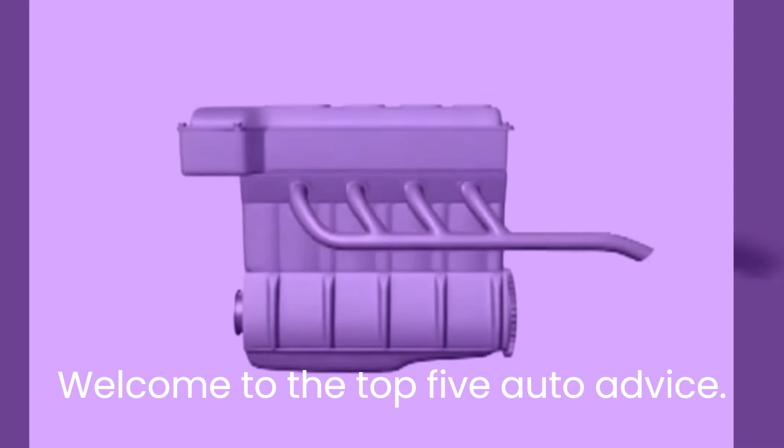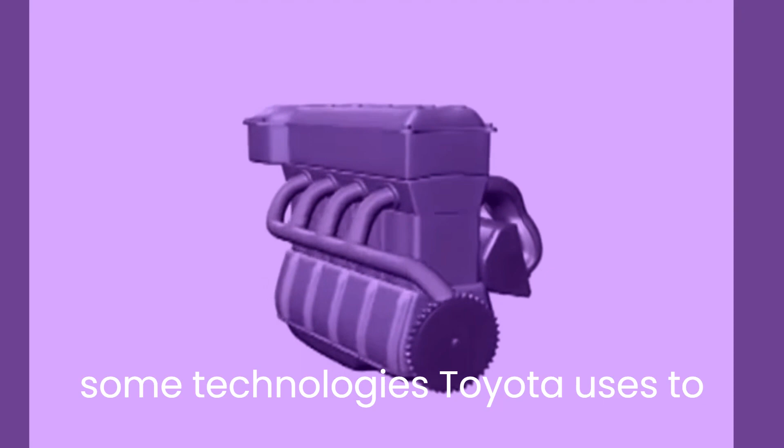First, we'll review the fundamentals of how an engine operates and some basic engine terminology before we examine some technologies Toyota uses to maximize engine performance and economy and reduce emissions.

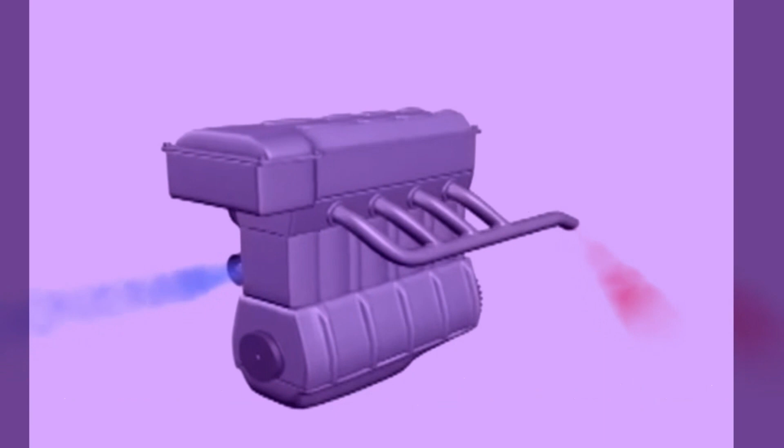We'll now look at the fundamental parts of an engine. The engine's main parts are the engine block and cylinder head. The engine's internal parts include the cylinders.

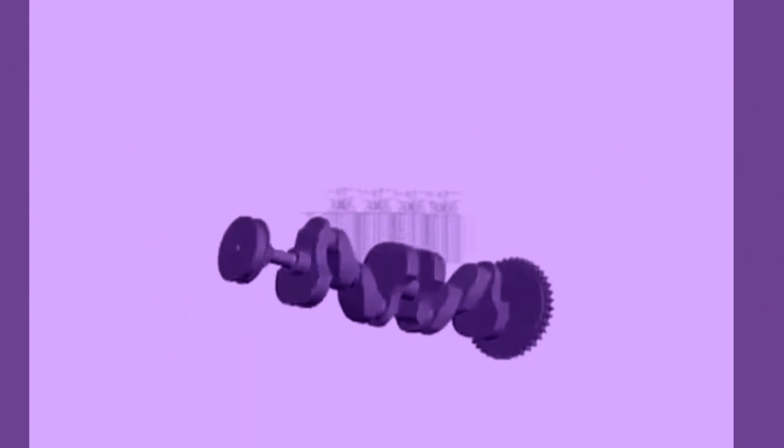An internal combustion engine requires fuel and air to operate. The more effectively an engine breathes, the more effectively it will produce power. Key components include the connecting rods, crankshaft, spark plugs, pistons, the intake and exhaust valves, and fuel injectors.

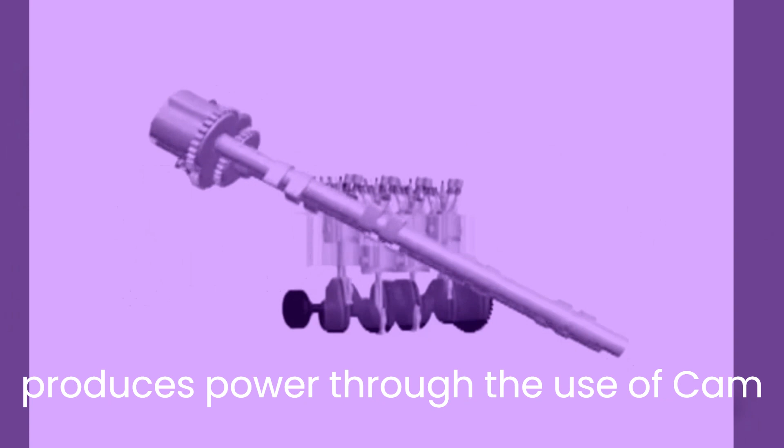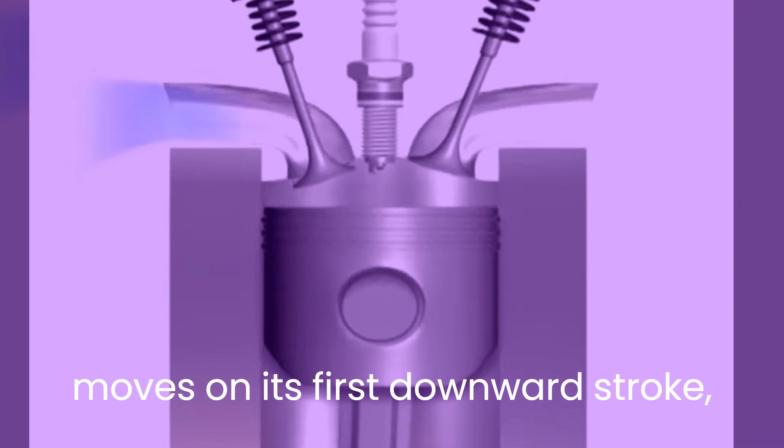The four-stroke engine produces power through the use of camshafts and a timing chain or belt. The intake stroke occurs as the piston moves on its first downward stroke, allowing a mixture of air and fuel to fill the combustion chamber.

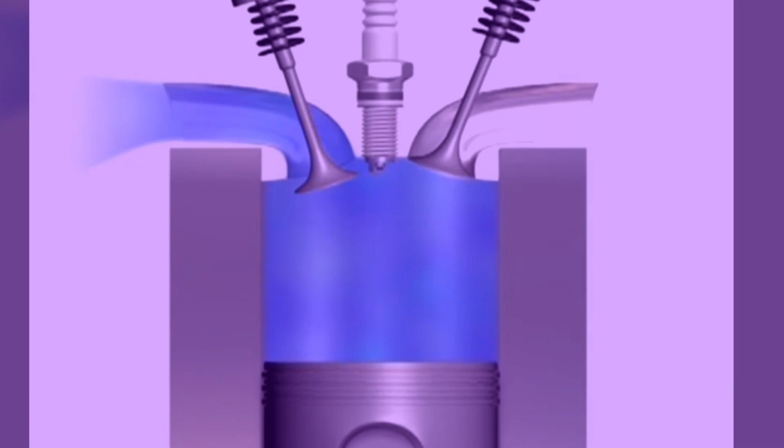The compression stroke occurs as the piston moves on its first upward stroke, compressing the air-fuel mixture, which will cause it to burn more vigorously than if it were uncompressed.

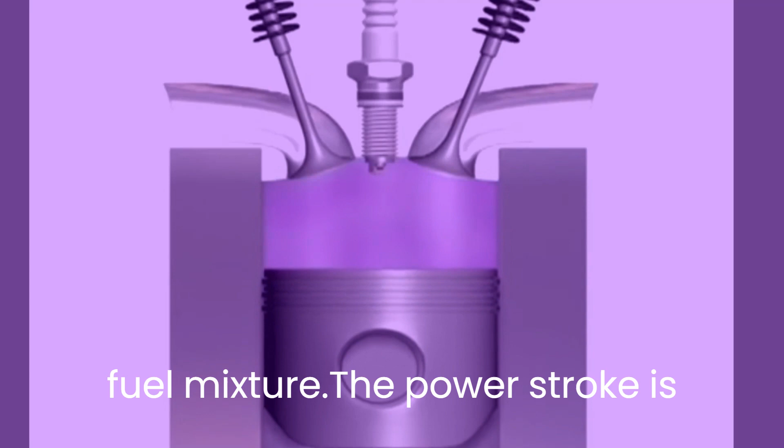Finally, the spark plug ignites the air-fuel mixture. This is what we refer to as the power stroke. The exhaust stroke occurs on the fourth stroke.

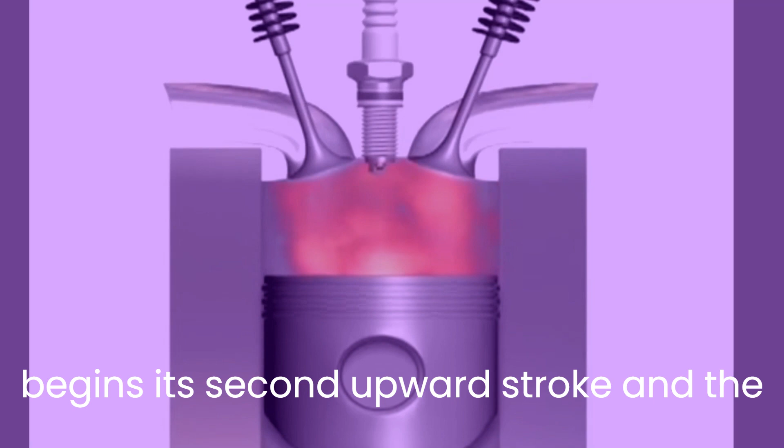The exhaust valve opens as the piston begins its second upward stroke, and the burned air-fuel mixture is ejected from the combustion chamber through the exhaust valves.

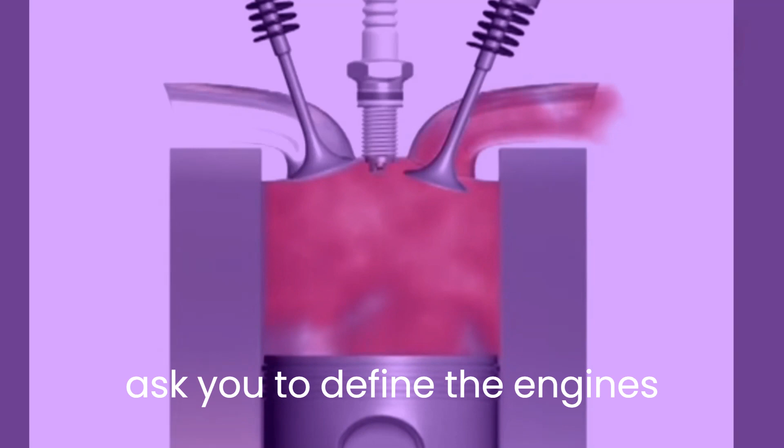Customers might ask you to define the engine's compression ratio and displacement. In this example, the compression ratio is 10 to 1. Higher compression ratios produce more power.

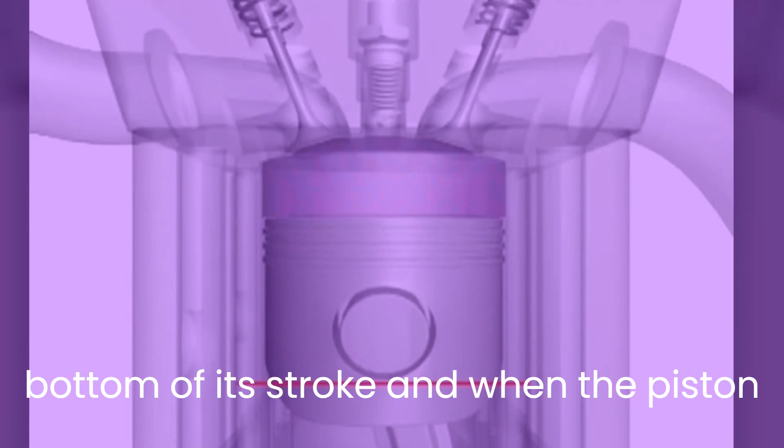Compression ratio is the ratio between the total volume of a combustion chamber and cylinder when the piston is at the bottom of its stroke and when the piston is at the top of its stroke. However, engines with higher compression ratios demand higher octane fuel than engines with lower compression ratios.

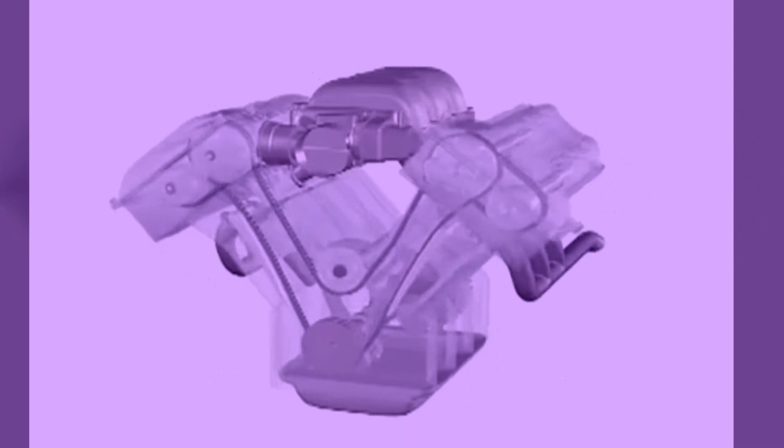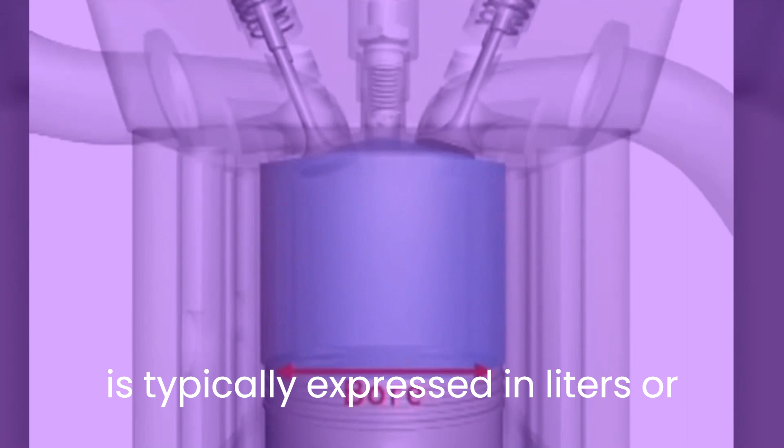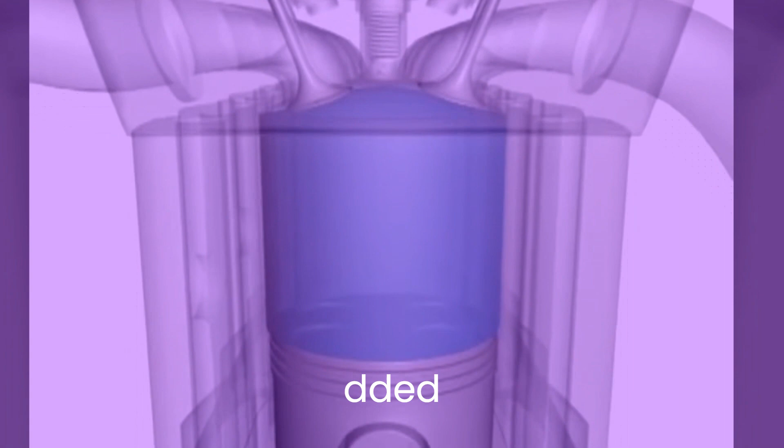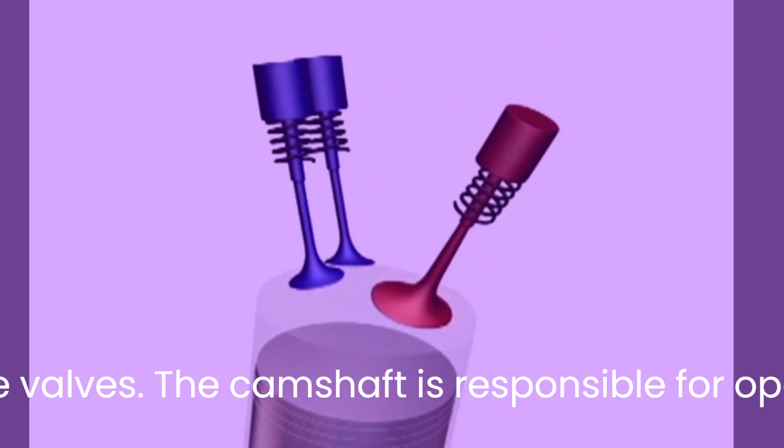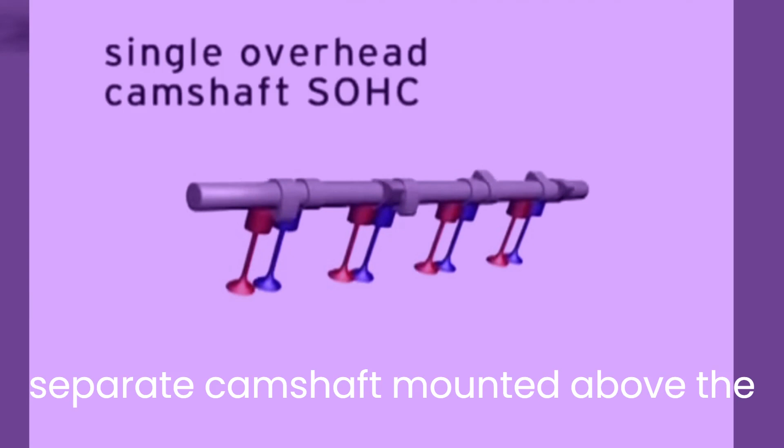The camshaft is responsible for opening and closing the valves in some engines. If the camshaft is mounted above the valves, the engine is known as a single overhead camshaft, or SOHC engine. When the intake and exhaust valves are operated by separate camshafts mounted above the valves, the engine is known as a dual overhead camshaft, or DOHC.

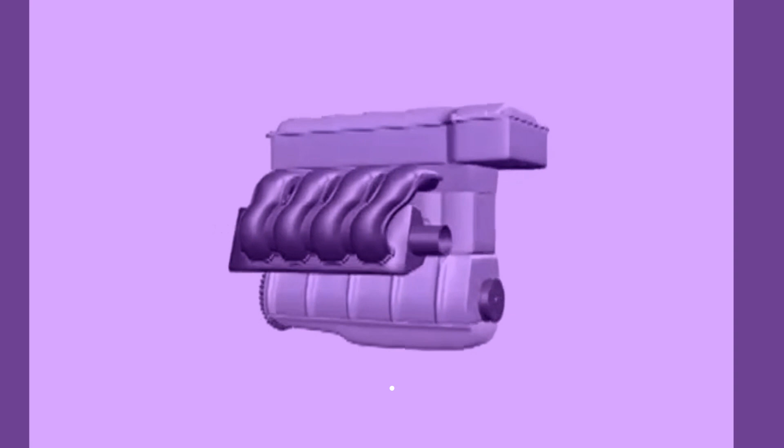DOHC, or double overhead camshafts, is the name of this design. There are double overhead camshafts in every Toyota engine. Most four-cylinder engines have an inline design, including all Toyota four-cylinder engines.

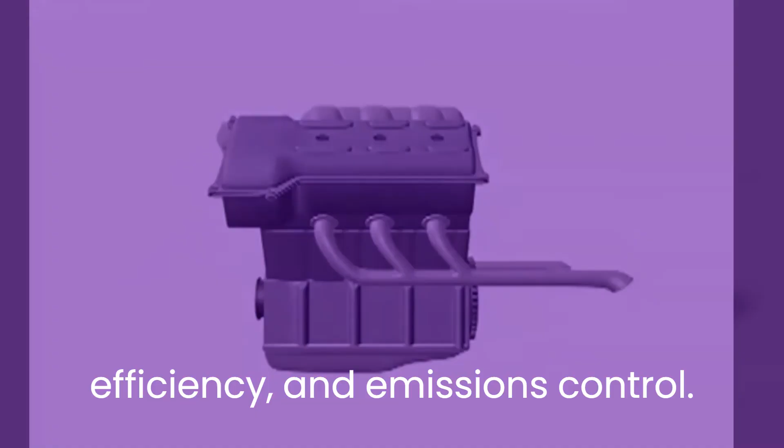How are cylinders typically arranged with more than 4 cylinders? In a V configuration. Let's examine the technologies Toyota uses in its engines to improve power output, fuel efficiency, and emissions control. All of Toyota's 6- and 8-cylinder engines are V-type engines.

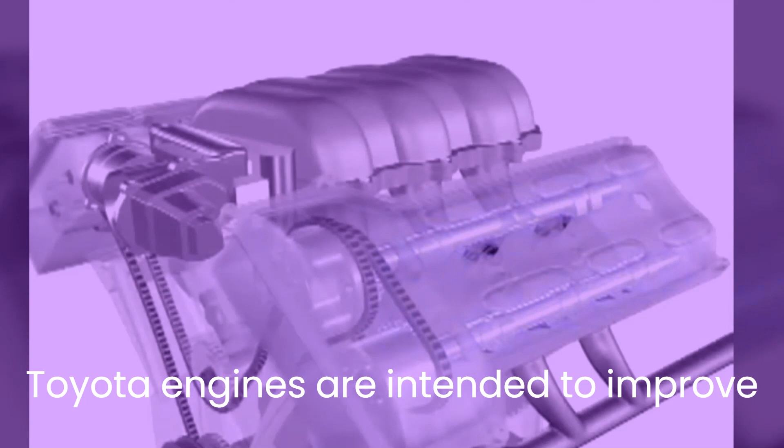An engine will produce power more effectively the more effectively it can breathe. The acoustic control induction system and other features found in Toyota engines are intended to improve the engine's ability to breathe. In order to maximize air flow into the engine and to provide more usable power throughout the entire RPM range at low speeds, the intake manifold's runners automatically vary in length.

To generate sufficient low-end power and torque, ACIS directs intake air flow through a long intake runner. Imagine doing this while inhaling deeply as you lift something heavy while driving at low engine speeds.

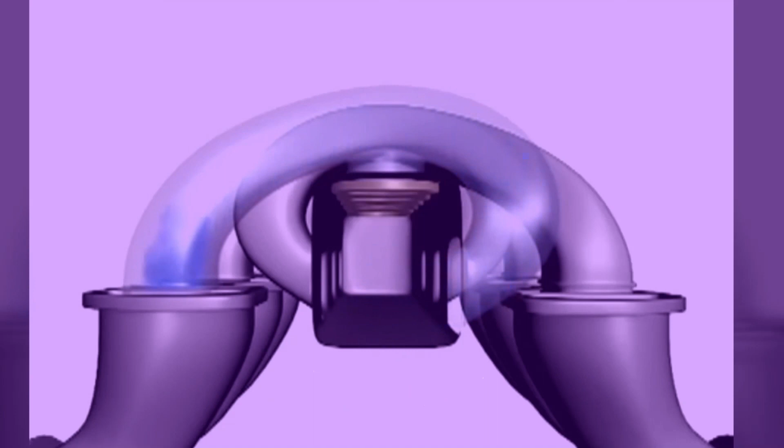In order to produce more horsepower, ACIS directs the air through a short intake runner. Some manufacturers compare it to taking rapid, shallow breaths while operating.

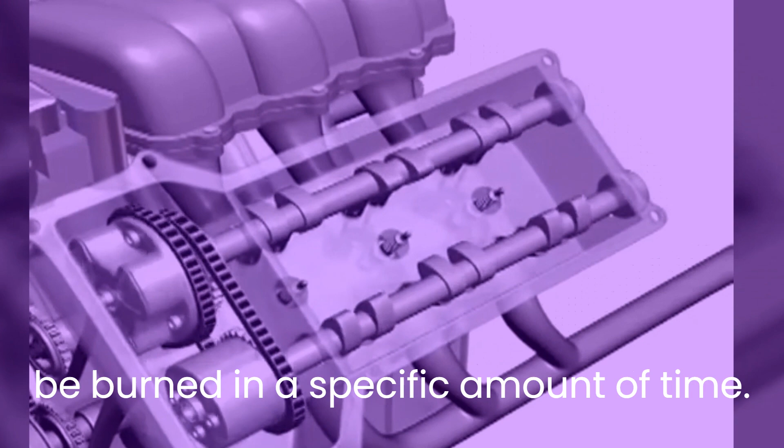Double overhead cam, or DOHC engines, which are standard in all Toyota vehicles, allow for the best placement of the valves. Benefits of a DOHC design include enhanced power output, fuel economy, and emissions control.

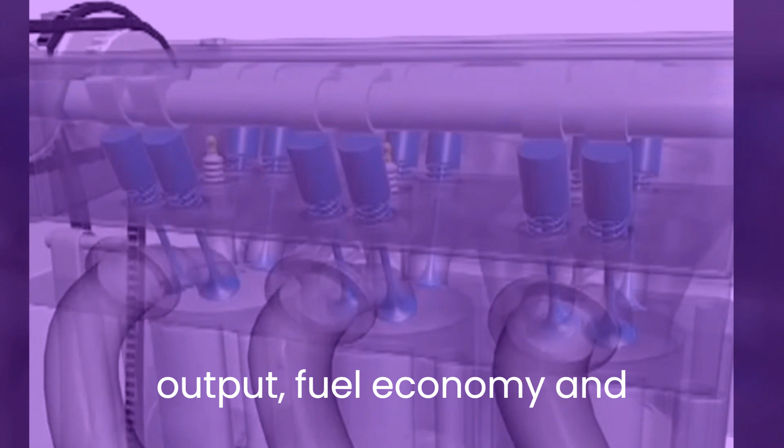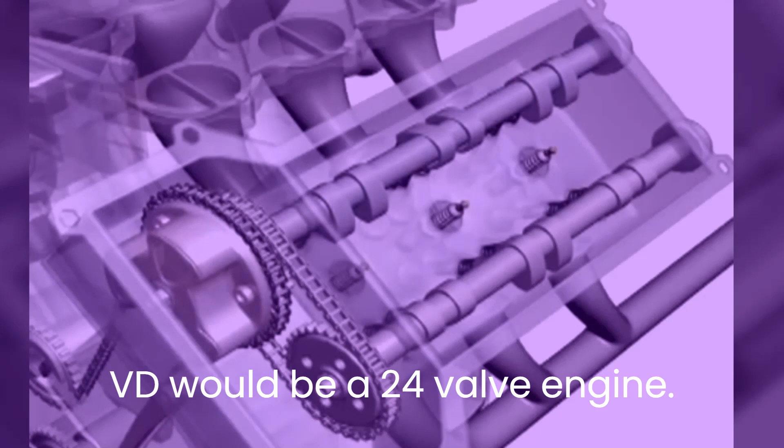Toyota uses 4 valves per cylinder rather than 2 or 3, which enhances the engine's performance in the intake and exhaust systems. A 6-cylinder engine with 4 valves per cylinder and variable valve timing with intelligence, or VVT-i, would be a 24-valve engine. A computerized system changes the intake valve timing to optimize the engine's breathing depending on the conditions.

Without VVT-i, valve timing is fixed regardless of how fast the engine is turning. So an engine that performs well at high speeds won't perform as well at low speed, and vice versa.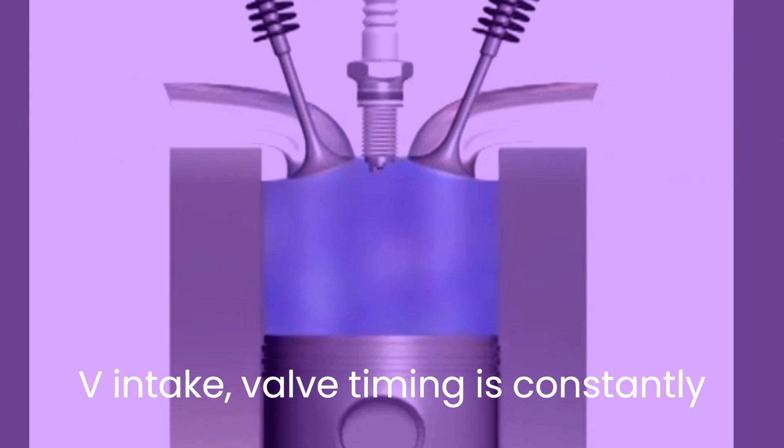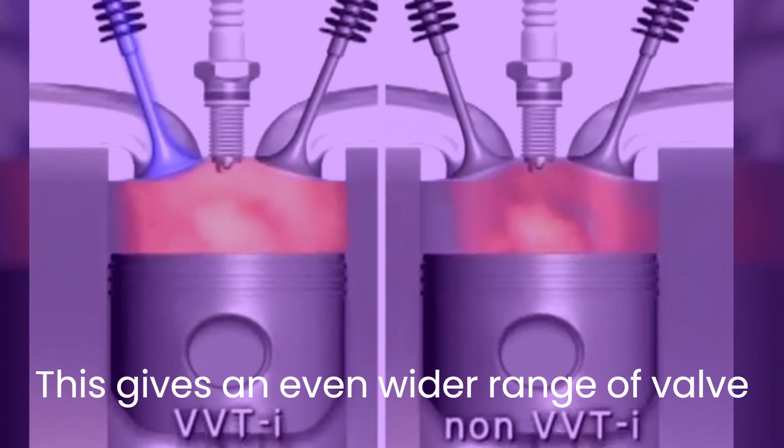With VVT-i, intake valve timing is constantly adjusted, enabling the engine to produce horsepower and torque across a broad RPM range, or power band. This gives an even wider range of valve control in combination with one another.

Because the intake and exhaust valves can be controlled separately by double overhead camshafts, the power and torque output and fuel efficiency are improved across the entire power band of the vehicle.

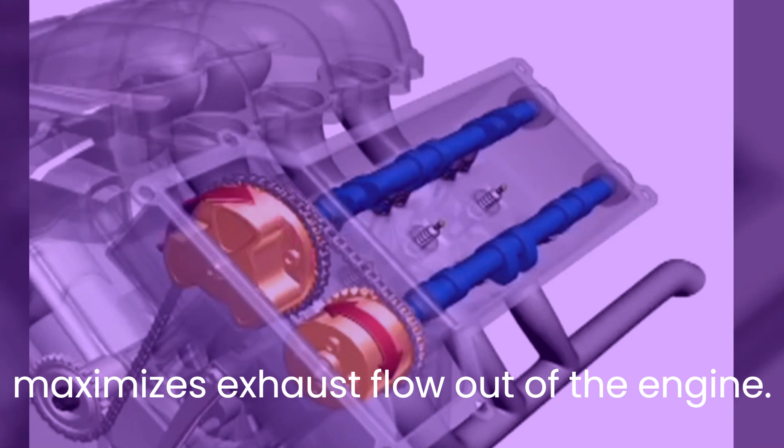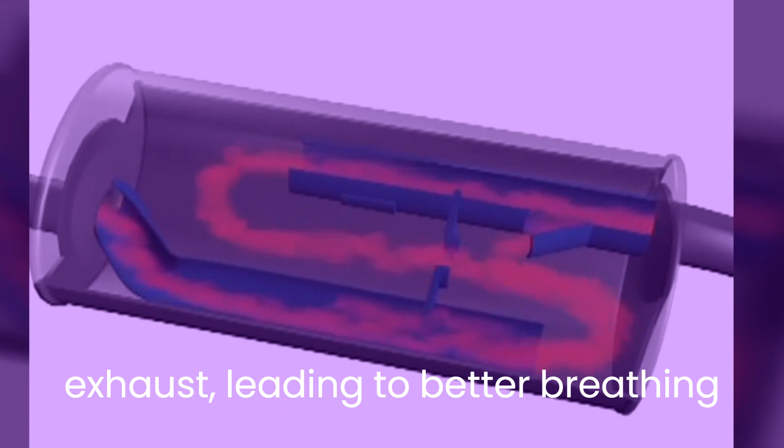Similar to ACIS, a dual-path exhaust system maximizes exhaust flow out of the engine. A second path or chamber opens in the exhaust system at higher RPM to help evacuate the higher volume of exhaust, leading to better breathing with less back pressure.